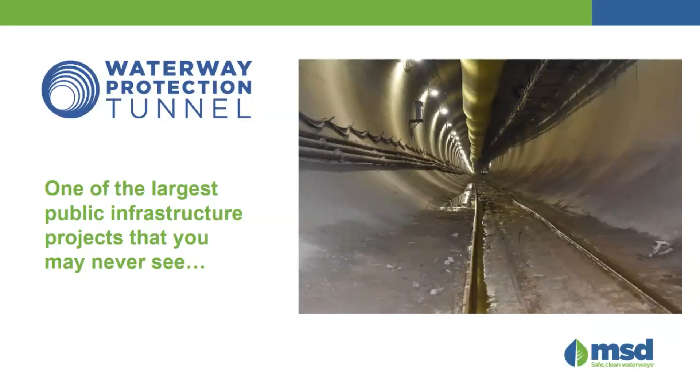So anyway, the waterway protection tunnel is a real innovative approach to reduce pollution into our waterways. It is a project that Louisville residents will probably never see, but it is a project that definitely we will benefit from in big ways for many generations to come.

The protection tunnel is a project that is happening 18 stories underground. It is 4 miles long, 20 feet in diameter, and it's going to take us about 3 years. We're about a year and a half in to really get it completed.

The value of the tunnel is that once it's completed, we will be able to capture and store, on a typical rainfall year, 439 million gallons of pollution that will be kept out of the Beargrass Creek and the Ohio River waterways. It is a project that is about a $200 million project, and those are big numbers.

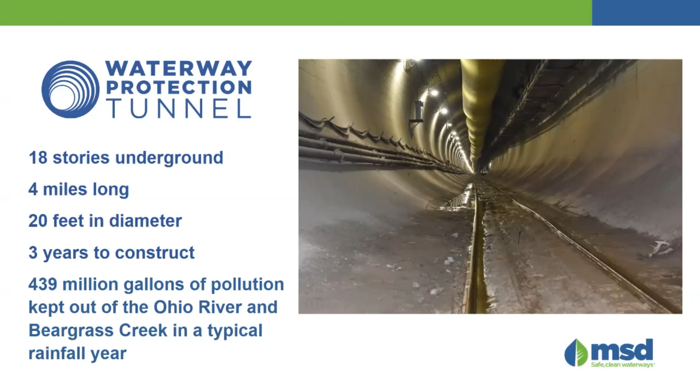We recognize that, and when you think about the numbers, 200 feet deep is 18 stories underground. This is just a snapshot of the Aegon building, I think it's now called the 400 West Market building. But 18 stories underground, if you flip that over, we're actually working 18 stories and 200 or so feet underground on this project.

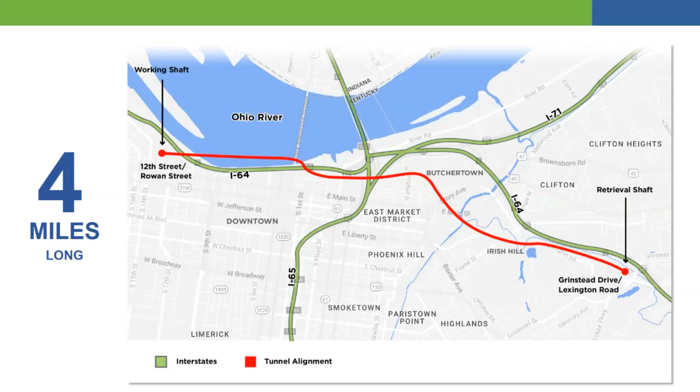It's 4 miles long. It begins at 12th and Rowan Street, and it ends at Grinstead Drive at Lexington Road. So there's a 4-mile alignment shown here on the red line on this map. It is a project that we kicked off with a groundbreaking, and the benefit is that it will allow us to reduce the amount of gallons of pollution entering our waterways.

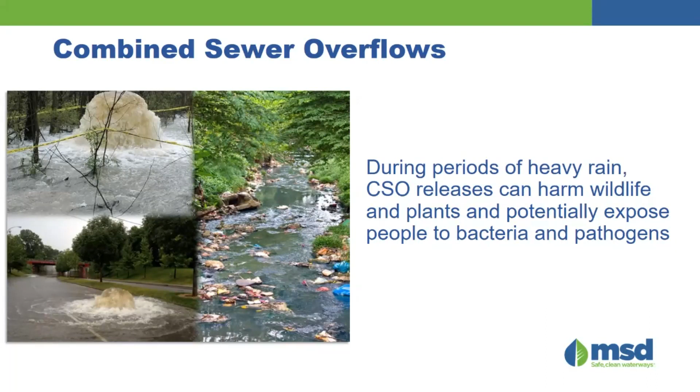Collectively, the tunnel is something that is broader than what it looks like. It's really a piece of a large project, or a large responsibility that MSD has, and that is because of combined sewer overflows. During periods of high rains or heavy rains in our community, combined sewer overflows actually release and overflow into local waterways, which can harm wildlife and plants and potentially expose people to bacteria and pathogens in our communities.

Some of you may not have heard of combined sewer overflows, but essentially, when you look at this graphic here, over 100 years ago they were designed basically to capture and transport both stormwater and normal flow from our residents and our businesses. During periods of heavy rain, the combined sewer systems can become full with stormwater and sewage, and back then the state-of-art design was that they were designed to overflow when they got full. That was advanced wastewater technology in the late 19th and early 20th centuries.

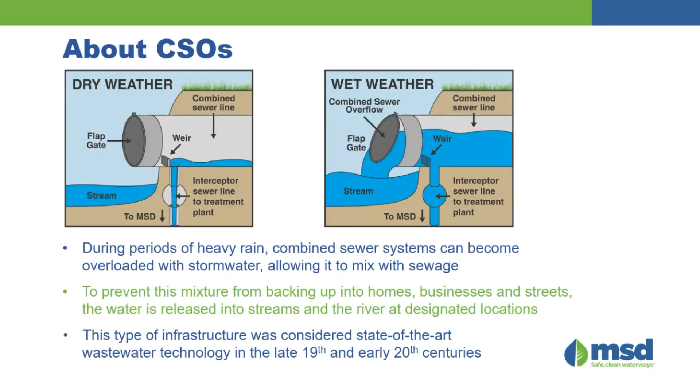Since then, we've had a lot of changes in the regulations and the EPA requirements that are requiring us to reduce the amount of overflows escaping from those combined sewer systems. In our city, we have a number of combined sewer locations. This map gives you a snapshot of most of them, which are inside the Watterson loop, our downtown district, downtown neighborhoods, and the West End.

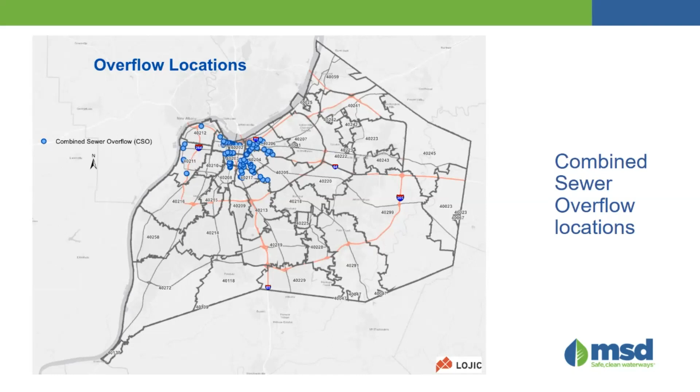So it's very important that we look at how we can accomplish the requirements under the consent decree that we entered into in 2005 with US EPA, which basically commits MSD to greatly reduce combined sewer overflows and eliminate sanitary sewer overflows in our system. Our current estimate is that it's going to be about a $1.2 billion program for stormwater and drainage to meet the requirement.

Our current prescribed deadline is 2024. I do want to mention that even though we've been under this consent decree, we still have a lot of other challenges in our system with aging infrastructure and with regulatory changes.

About 3-4 years ago, we rolled out our 20-year critical repair and reinvestment plan that highlights all the things we need to address from an infrastructure perspective. So we're continuing our discussions with the regulators to figure out how we can address the priorities and how we can do work given the budget constraints we have.

And so that 2024 deadline may have to be extended. But the consent decree program so far, we have done a lot of work to reduce overflows. This is just a snapshot of what we call a storage basin or a CSO basin.

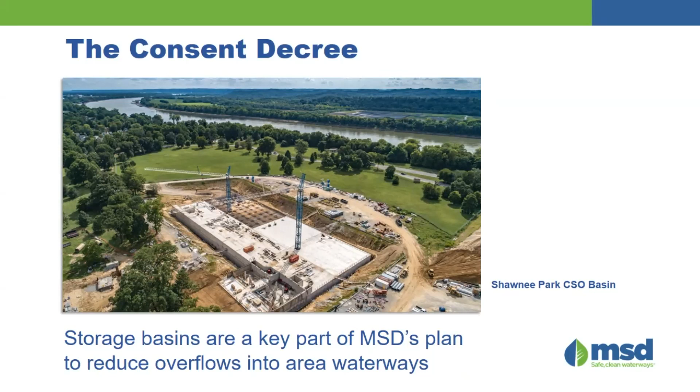They are designed to capture rainwater and sewage during a rain event. Once that rain event subsides, we will be able to pump that into our treatment system to make sure that we're treating that wastewater and stormwater so that we're not overflowing into streams.

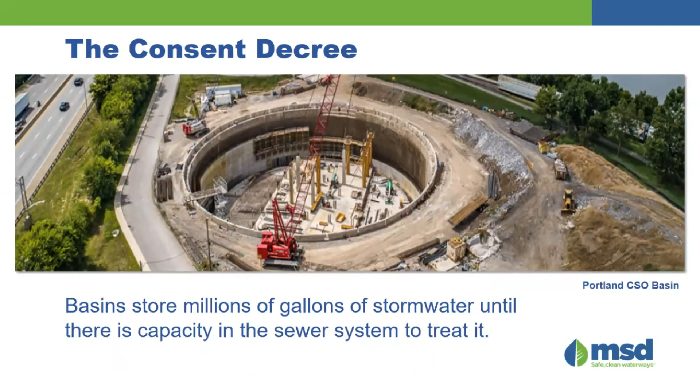Again, this is just another snapshot of a basin that we've built. And these are huge basins, and they are very, very invasive in communities and in projects, and in areas. So even though we've done a number of these large basins, you can see we have 14

overflow reduction facilities, which has about 266 million gallons of storage. The waterway protection tunnel adds another 55 million gallons of storage capacity.

Before the consent decree work began, on a typical rain year, we were seeing about 6.5 billion gallons of overflow into our local rivers and streams. Our work to date, including the basins and the tunnel, will reduce that overflow in a typical rain year to approximately 660 million gallons.

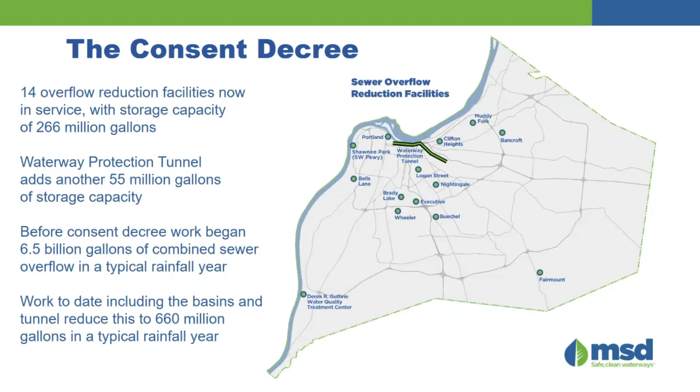And we have additional planned work that will reduce that number even further. So as you can see, a significant benefit to the environment. So let's talk about the tunnel. The underground

innovation that this project brings - basically the tunnel will capture overflows from 25 combined sewer overflow locations in our city. You can see that this is highlighted on the map in orange.

One of the things we learned from all of the large storage basins we built - we still had 4 more basins to build to be able to meet the requirements under the consent decree for these 25 CSOs and neighborhoods. So as we studied it more, we determined that tunneling technology and equipment had become more readily available and could actually replace those 4 basins.

If you look at the route of the tunnel, you can see that keeping construction underground would be less invasive and less impactful to the communities depicted on this map. So moving to tunnel technology is a win-win, not only for MSD, but for the community and for the environment.

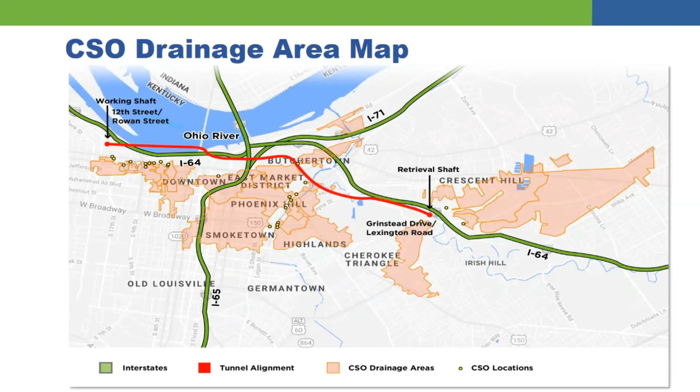The tunnel starts really - when you think about going 200 feet down, you have to have what we call an entry shaft and a retrieval shaft at the end of the project, 4 miles down the road.

Our entry shaft is located at 12th and Rowan Streets, and that was dug first. The yellow cage you see in this is actually the elevator that our crew members take every day to access the tunnel job site.

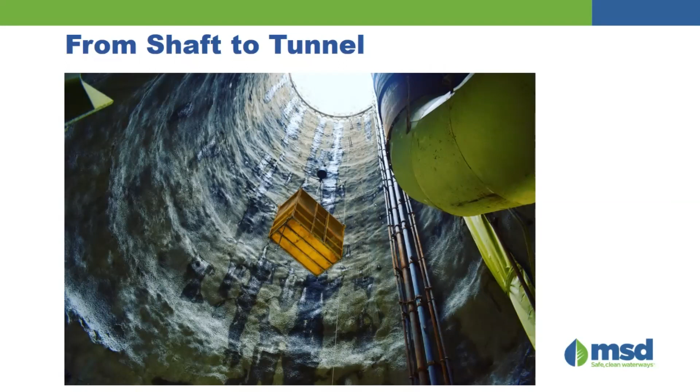Once we're there, our crews at the base of the working shaft, 200 feet beneath the surface, had to do a lot of what we call horizontal excavation work, and a lot of drilling and blasting. Once we created enough room and excavated there, we were able to bring the real heavy equipment in.

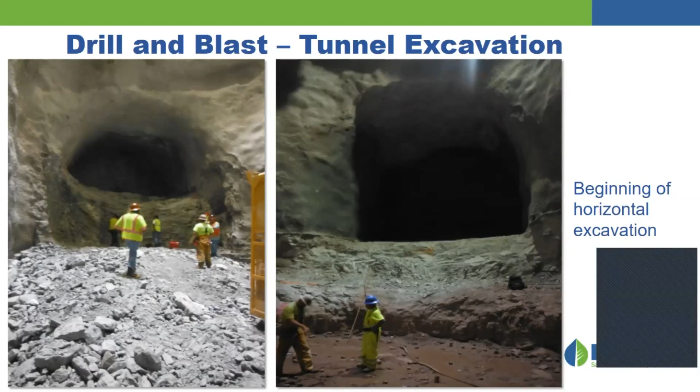This is just a schematic of the boring machine that we call Bumblebee. The Bumblebee is more than the length of a football field, weighs 885,000 pounds, and moves with 3.5 million pounds of thrust. So that's a large machine.

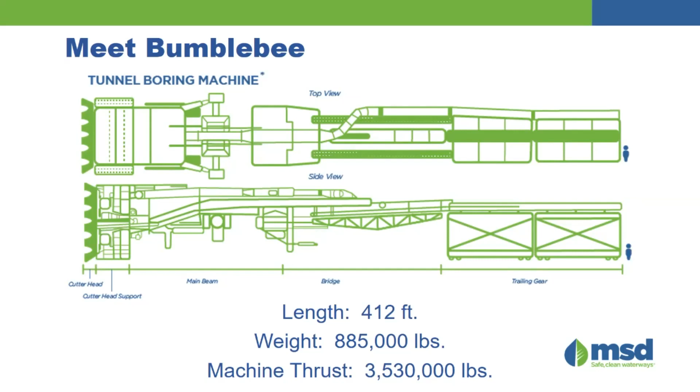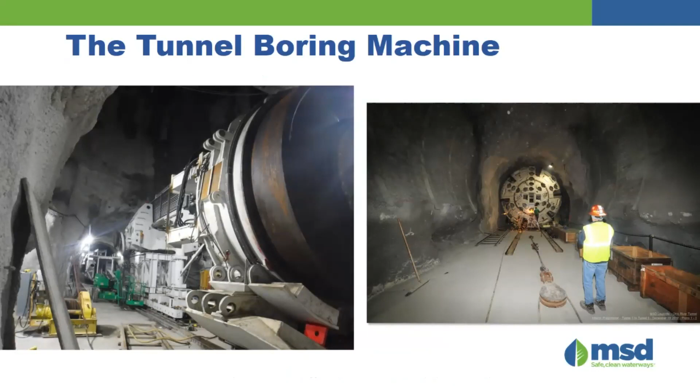If you can imagine trying to get that assembled - this gives you a snapshot of what that looks like down into the entry shaft, and how we had to bring that in and get it assembled before we could start our tunneling project.

Bumblebee - this is the boring head. We had an opportunity to do a groundbreaking on this project, and I do know that Councilmember Bill Hollander and Barbara Sexton-Smith were also at that groundbreaking, and we appreciate the support they have shown for this project.

We named the cutterhead Bumblebee. We had an employee contest to name it, and our employee Mike Fitzner suggested the name in honor of Muhammad Ali, because this is going to be a big project that's going to float like a butterfly but sting like a bee. And that's what Bumblebee is designed to do - work very hard and be very effective.

And since it's underground, you're really not going to see it. Keeping track of the work, the public has been able to track Bumblebee along the 4-mile journey over the past couple of years by checking our website tracker. And just last week, Bumblebee reached a very exciting milestone at Grinstead Drive and Lexington Road as she broke through the tunnel terminus.

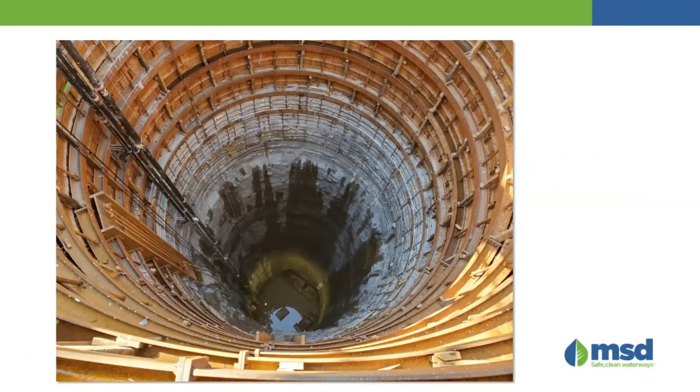I think that is where the retrieval shaft is, another shaft 200 feet underground where the Bumblebee boring head would be breaking through. I think what we have here is a video showing the moment of breakthrough. You'll notice on these screens green marks, which is the survey line showing where this thing was supposed to come through. I'm proud to say that after 4 miles of boring, this came really in on point. That was just an excellent approach. So let's watch this video.

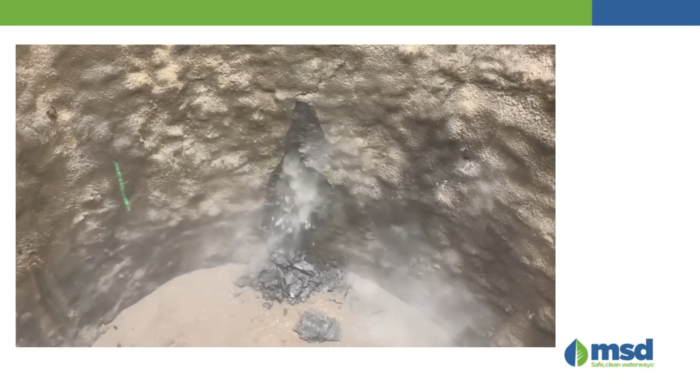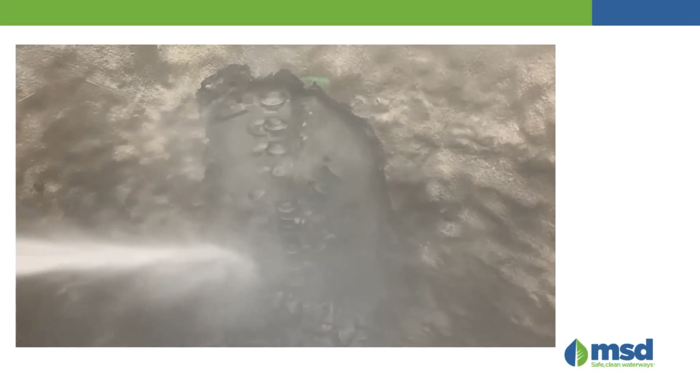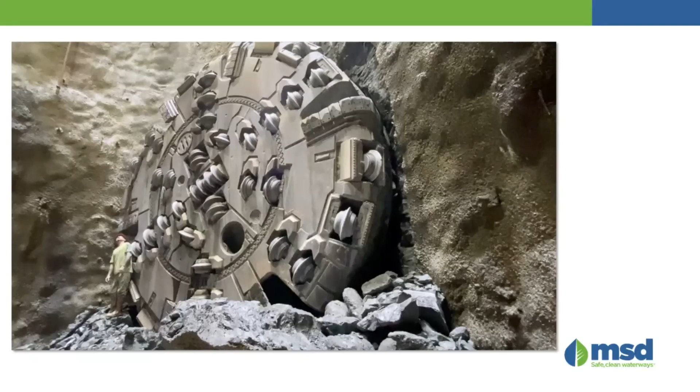So this kind of shows you, once it was all the way through, what the boring machine really looks like at the bottom of the retrieval shaft. You see a person in the picture there that gives you the magnitude of the size of that boring machine. As I mentioned before, years of planning and engineering went into this moment to have the Bumblebee break through, and Jacob Mathis, our project engineer, just did a phenomenal job.

All of our MSD inspectors and the contractors who worked on the job did a remarkable job on this project. The other thing I want to point out is with a large infrastructure project, we were able to create 200 jobs with the construction of this project. MSD has an initiative, as Alex mentioned earlier, on how we can not only do projects but be an economic boon by creating jobs and giving opportunity for local labor and economic inclusion on all the construction projects we do.

So now that the Bumblebee has broken through, what is next? Now we have to actually disassemble that large boring machine - again, the length of a football field and a lot of material. A number of tractor trailers are necessary to transport that out of there. Once we disassemble and remove the tunnel and the conveyor belts, we'll be able to start lining the interior of the tunnel with 12-inch thick concrete.

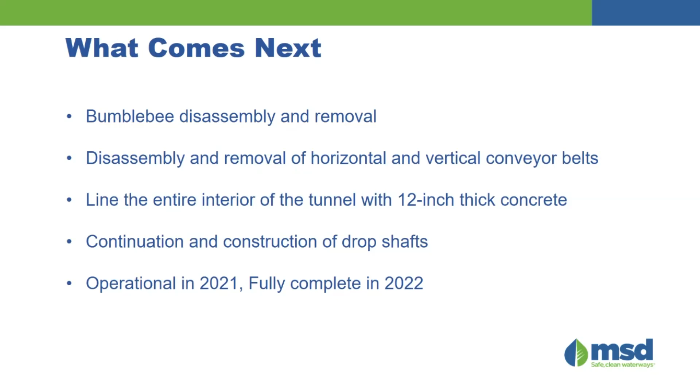And that will continue over the next few months. We think that by this time next year we'll be operational, and fully complete by January of 2022. So an enormous project. And when we are done, there are a lot of other things we try to do, making sure that whenever we're doing work, we're leaving amenities. So when our work is complete, we're excited to turn our 2 above-ground job sites over to the community.

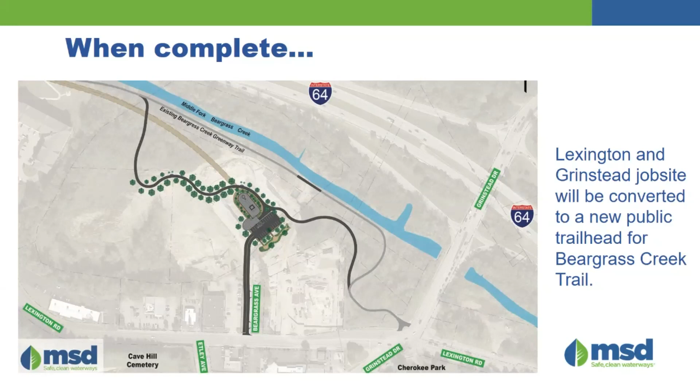At the tunnel's terminus at Lexington and Grinstead, we will convert a portion of this area to a new public space that will serve as a trailhead for the popular Beargrass Creek walking and biking trail. At 12th and Rowan, where the entry shaft was, that job site will be turned over to Waterfront Development Corp for phase 4 of the Waterfront Park. So again, we're very excited about that.

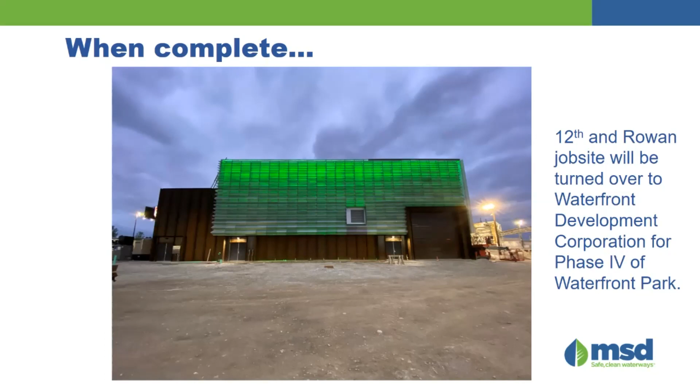Also down at the 12th and Rowan site, there is a large pump station that, as you can see, has been designed to fit into a future park-like setting, able to pump the tunnel when it is full. We have to pump it after the rainstorm subsides. We need to pump that into our sewer system down to our Morris Forman treatment plant to treat the wastewater and the stormwater.

And so as the work continues, we have what we call Tunnel Tuesdays, where folks can get updates on our website. And when it's all said and done, we're excited to live up to Muhammad Ali's quote with our project, being very effective and efficient while also being unnoticed underground. So with that, that is the update, and I'm ready for any questions.

Okay, wonderful. We have several. So let me see here.

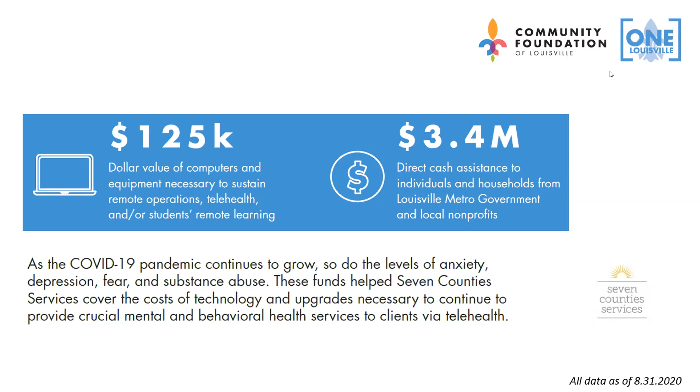We want to thank you for your support, and for making support to so many people in our community possible. I certainly wanted to save some time, Julie, for any last questions that folks might have, or anything people might want to know that wasn't in the slide.

Tricia, I'll go ahead and kick it off. In terms of the fund, will you continue to attract dollars and continue to serve people in need as this crisis, unfortunately, is still very much with us?

Julie, it's a great question. We definitely don't want to put out the impression that the crisis is over, because unfortunately we know that it is not. However, really the One Louisville Fund was designed to be emergency support, and what we know from many years of doing emergency support is it's really important for that to have a start and an end.